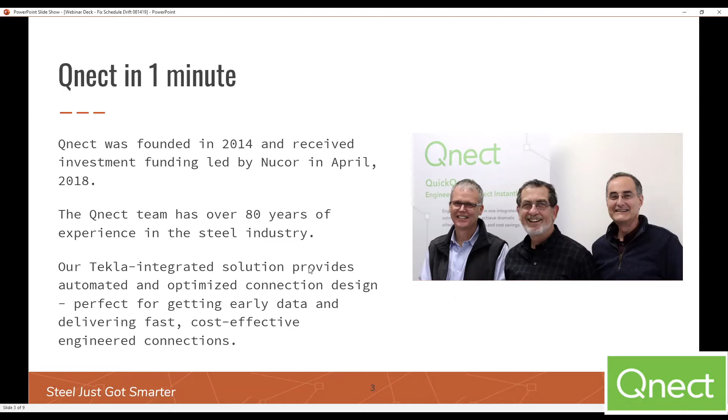So here, let's start the technical presentation, and we're going to cover two areas that are very powerful in helping minimize schedule drift. The first one has to do with the extraordinary speed of our software that will provide weeks and weeks, if not months, depending on the size of the project, of buffer time that will help facilitate changes that will happen.

The second part of our software and presentation's power is the speed in making revisions. Obviously, there will be a great deal of revisions on every job, and our software is extraordinarily fast for that purpose and includes connection engineering. As you know, conventional systems require a connection engineer and a detailer. We still need both, but Qnect will integrate those.

So why do changes happen? Well, obviously there are many changes, and I probably don't need to tell you what they are, but let's just do a synopsis of how it could happen. An owner has a building, they're trying to secure a tenant, they move the process back, they're anticipating a tenant by a certain date, therefore we move the erection date, drawings for approval date, and therefore the design drawings need to be released by a certain date.

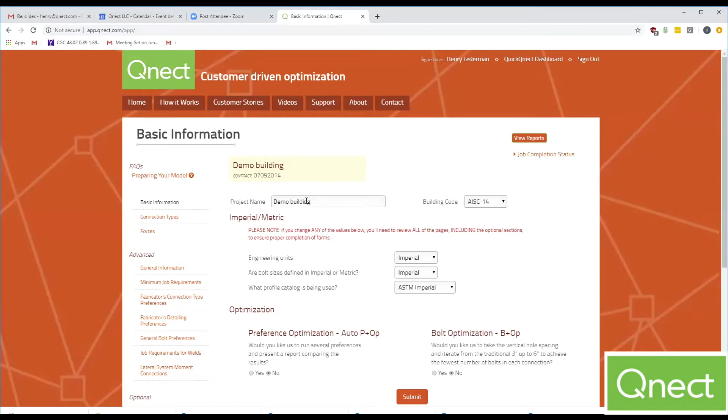Let's now move to the first part, but the first thing I want to do is a quick refresher of how Qnect works. This will be very quick. We're currently on the Qnect website. We have a job called the demo building, and on our Qnect website, we will prepare, set up, and introduce all of the parameters for both the design and the detailing of each joint. Each joint is custom designed, and a custom Tekla component is produced.

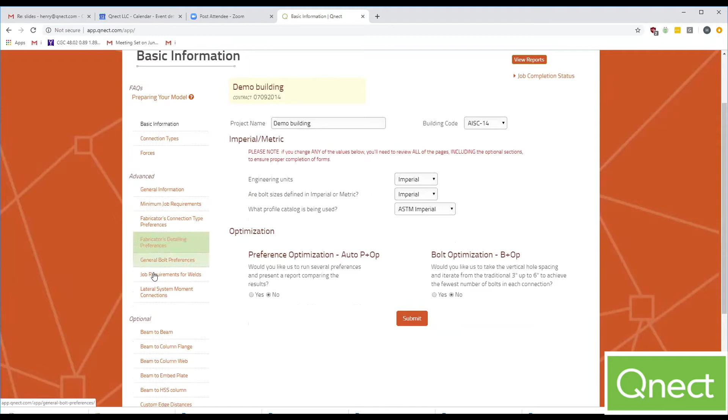Once this is all filled out with our support, then we're ready to have this information follow the connection engineering and the modeling from day one all the way through revisions. And of course, including estimating, where our software is often used in support of the bidding process.

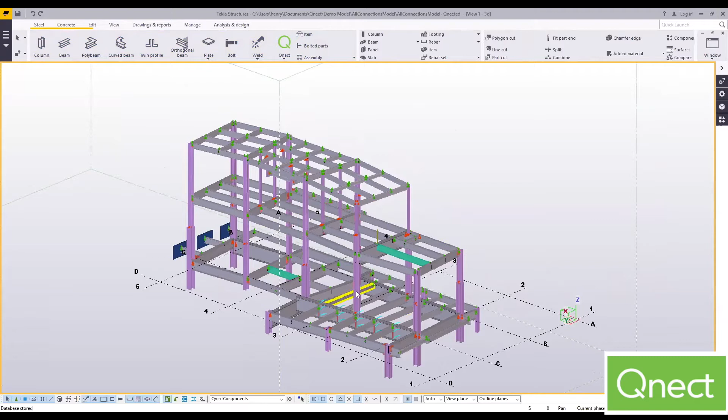Once you've signed up with Qnect and you open your Tekla model, which we're on currently, our buttons Q1, 2, 3 will show up. And the process is the same whether you're doing one joint, one floor, one phase, or the entire building. This is an already Qnected building. We connected about 201 joints, and we would have selected the whole building and hit button number 1. Then we would get an email that said it's done. We'd hit button 2, and this information would be populated back into the model.

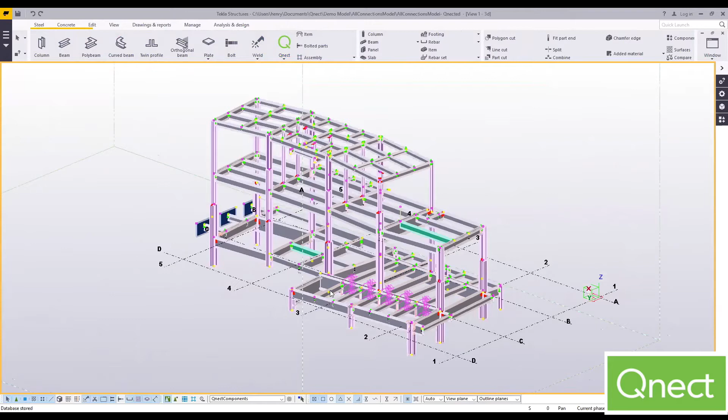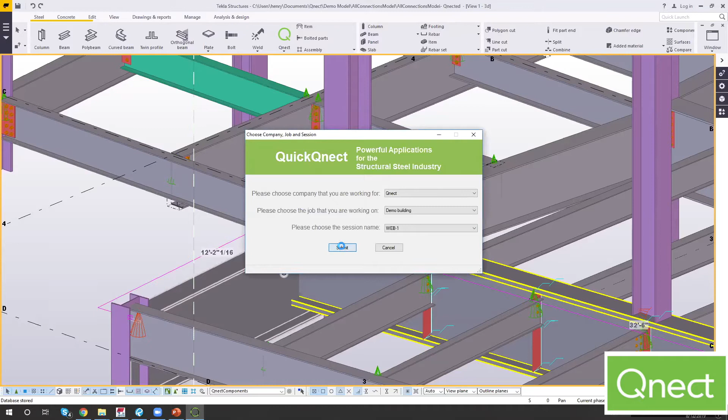So let's at least do one joint because it will take about a second. We select these members. We hit button 1. And this comes up. We sign in. We find a company. We find a job. And we will call this session Web 1. We submit. We don't have to wait for an email because with one joint, it is extraordinarily fast. And we see that it's already there. We submit, and it's complete. All right, so that's the process.

And as you can see, this uses the 3-inch standard spacing. So let's just show you very quickly what happens when we optimize a joint to give you the dual opportunity for speed and savings. So there are about 6 bolts. We'll delete this connection.

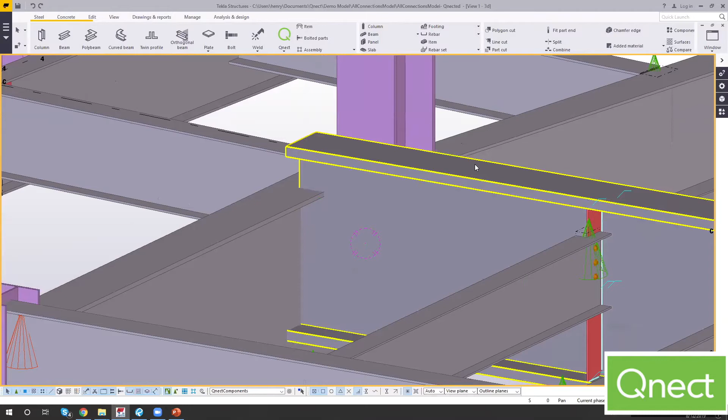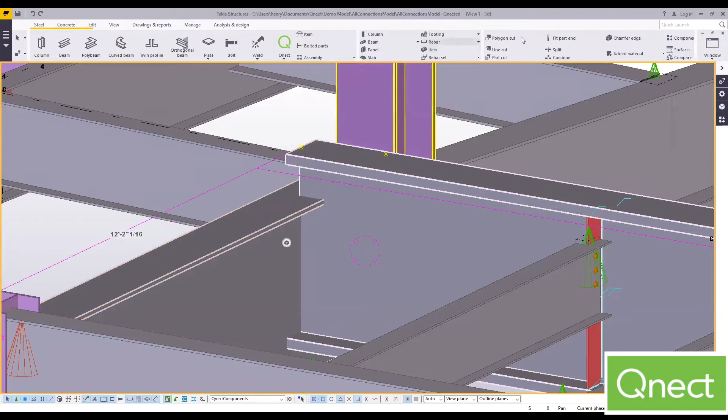We will go to the website and activate the optimization. We'll submit back to the model. Once that's activated, again, we'll select both members. We hit button 1. We'll give it a session name. We submit. We know it doesn't take very long.

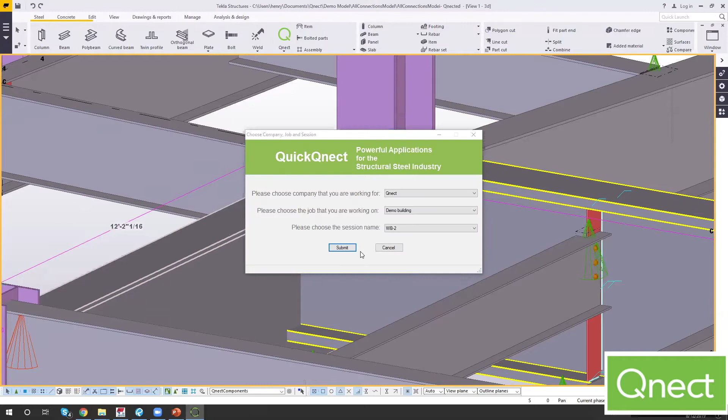We hit button 2. And it's not ready yet, so it's taking just a tiny bit longer. We'll hit button 2 again. And now it's ready, as you can see, and we submit. And we see for the very same reaction, this connection is now reduced by 2 bolts or 33 1/3%.

So this is the process. Whether you want to use optimization or not, it's button 1, button 2, and the whole model is done, or 60 to 80%, and then the connection is fully engineered.

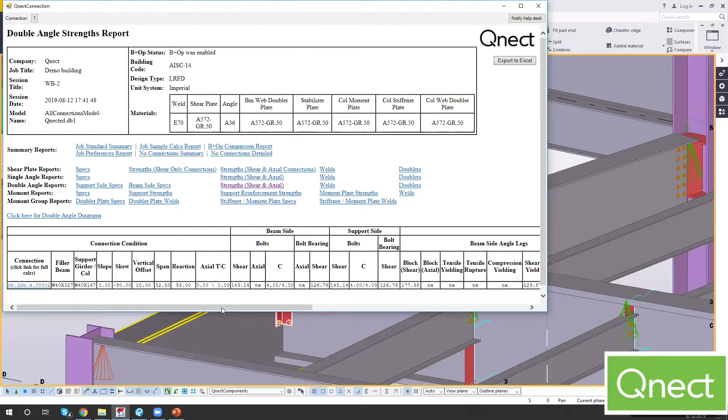Now let me show you real quick. Here's the first output, just the bolt size, angle size, general data. Then we'll show you the strength, which is the output limit states, all the limit states. And then if we click on the code, we'll see all the calculations, AISC references, etc.

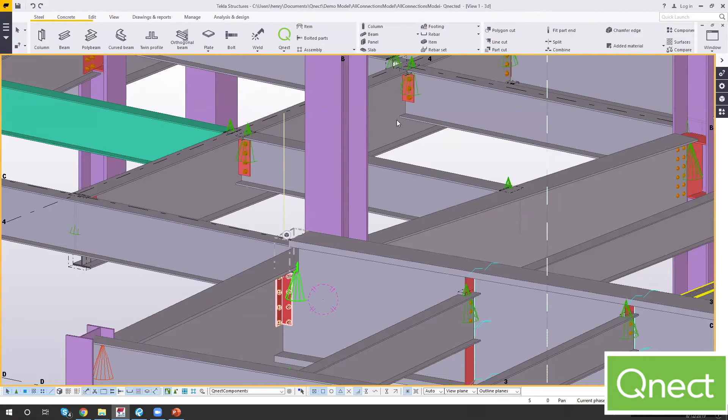So you've now seen the speed, the modeling, and the engineering. So let's just now look at how the speed creates the buffer of time. And you may want to jot down just for yourself, because you're going to be the one to determine it. How long would this model have taken you for connection engineering, and then for a detailer to model the connections in, no matter how fast they are and how well they use Tekla macros?

We all know that detailers are really pretty smart and fast with it. But the whole process between waiting for connection engineering, detailer interpreting the chart, creating the macros, putting it in, and then the detailer checker checking to see that that was done completely. Just write down for yourself how long that would have taken.

And now that you've done that, let's just note that this is about a 50-ton project. We connected 87%, and this 87% of connections, these 201 connections, took 1 minute and 20 seconds. So if you reduce 1 minute and 20 seconds from whatever you wrote down, whether it's 2 days, 1 week, 1 day, that's the buffer we created on this model.

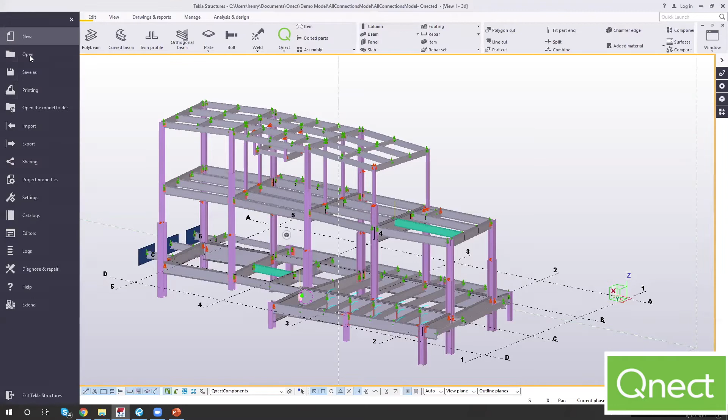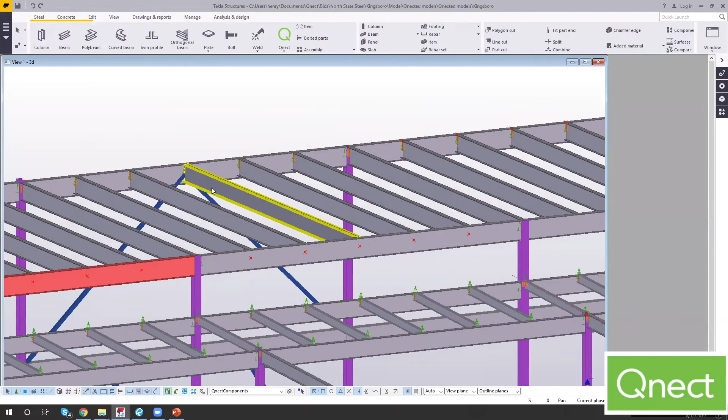Let's go take a look at a couple others. And just bear with us as these models get populated into the Tekla software so that you can do your analysis again. So here is another model where we Qnected it. We Qnected about 66% of the joints. Another, it's a nice job.

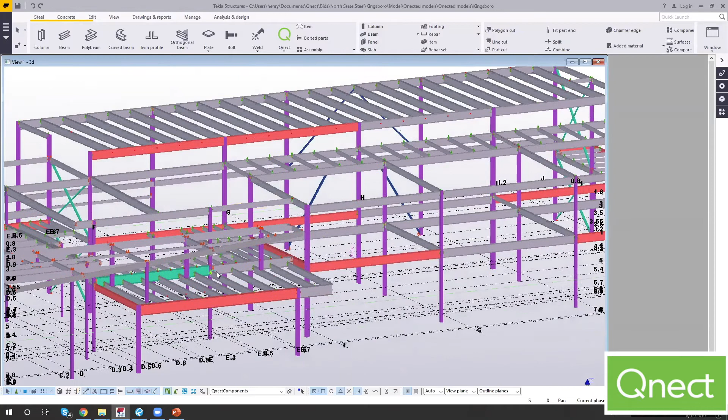It's about 200 tons. And I'd like you now to write down how long it would have taken, not just to model it, but the process between the connection engineer and the detailer that ultimately results in all of these connections being placed in the model. All right. And now that you have completed your math on that, I can report to you that we Qnected around 66% of this particular building, over 400 joints, and we did it in less than 10 minutes.

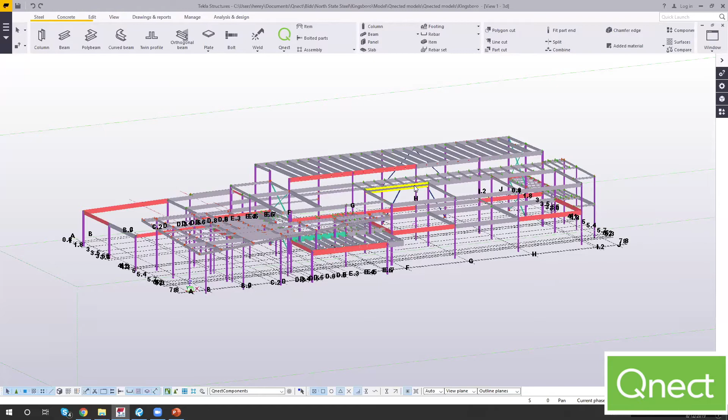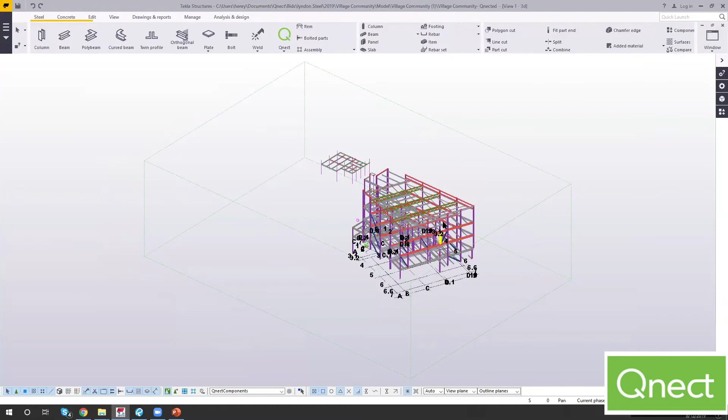And now I'm going to show you two more. Let's see, a village. Okay, that's fine. Let's do that one. And again, just bear with us as the model gets populated. We felt it was important that you see actual models of different sizes, so you can really start to appreciate for yourself how the buffer could get created.

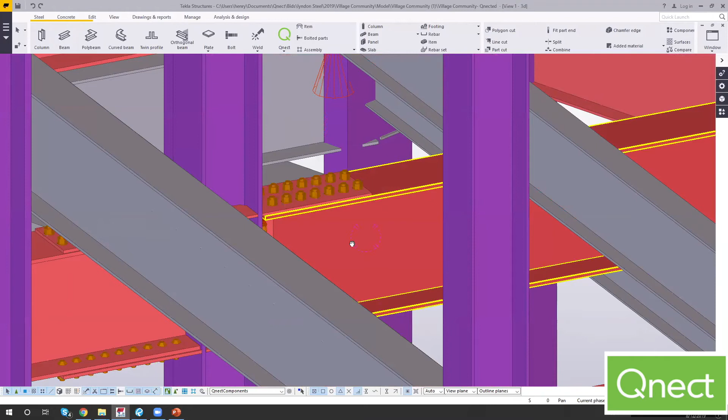So we see connections. Actually, this one, it's a very clunky building, very odd shape. I think we've got some moments in here. Here we go. You can see a Qnected moment connection there. There you go. So we've got quite a few connections on this one as well. Some more moment connections. We also do full pen weld.

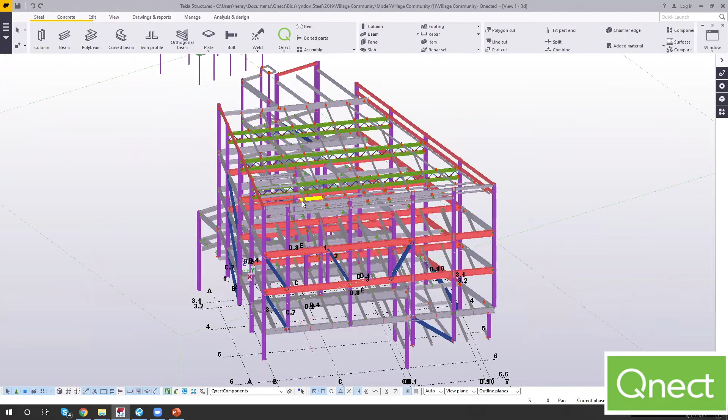So this model is 430 tons. We connected 53%, for different reasons that we could investigate. And often our first run is not where we stop, because then we go back in and we can increase the count, sometimes 5 to 10%, once we understand why it didn't connect.

So please write down again how long you think this would have taken you. Again, connection engineering, waiting for that, and so forth. So we connected about 53% of these connections, and this one also took us less than 10 minutes.

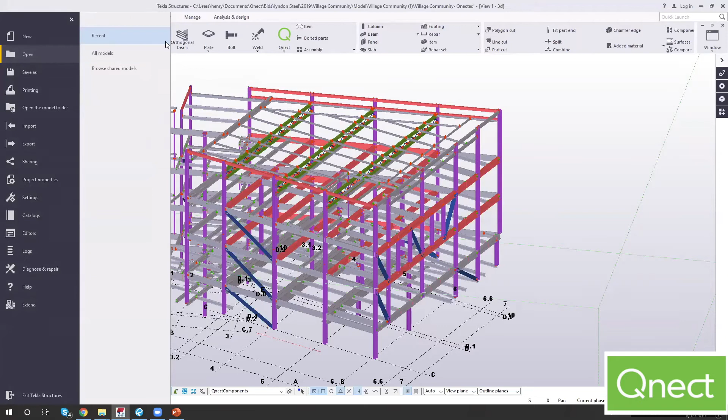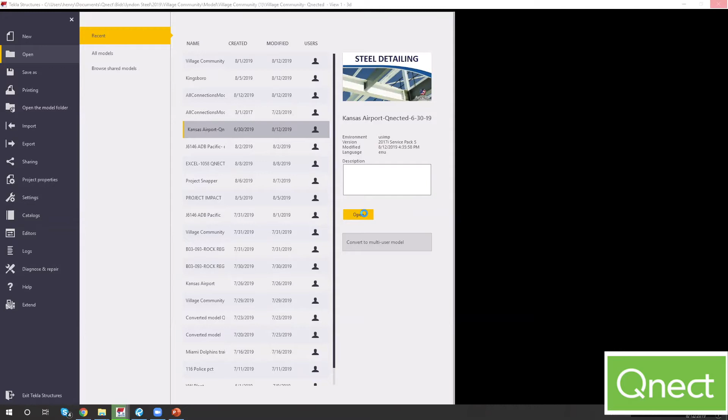And the last one I want to show you is a little bit of a larger project. This one is a project that is currently being negotiated. It's still in bid. So it's a pretty fresh project that people are competing for, and just bear with us, if you will, as this one gets brought in. It's, let's see, I think it's a little over, close to 9,000 tons.

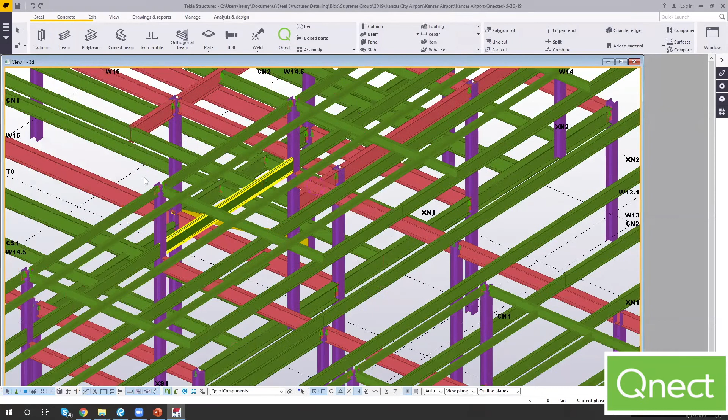And so we start to zero in on the connections. This one is not super complicated, but lots and lots of connections. There are many things complicated about it for sure, but Qnect is able to run through this pretty quickly. So make note and write down for yourself what you think this will take for connection engineering and detailing back into the model.

Now that you've done that, I can tell you that we've connected close to 6,000 joints, a little over 60%. And this entire process, once we had filled out the parameters on the website, took 2 hours. So if you remove 2 hours from your amount that you have stated it will take, there is your buffer. We did a 30,000 ton, 60-story building, 15,000 connections in about 3 hours.

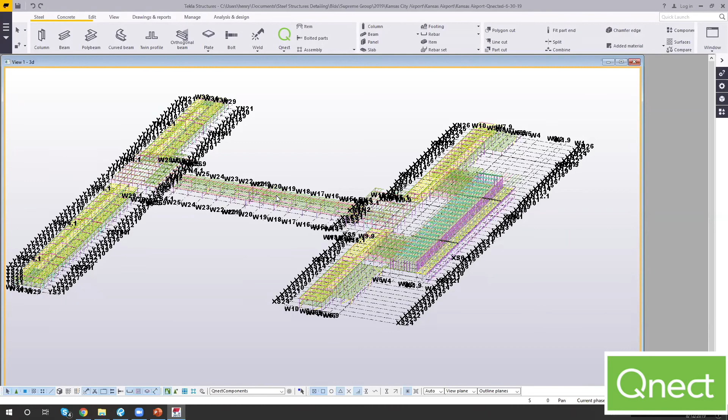So there is no question, not because we said so, but because our users have reported back, we will save weeks. And on one job, we are saving 19.2 weeks. Let's see, what's that job? I'm trying to remember now what it was, but it's a pretty big job. I can't say what it is, but we generally see time savings of 20 to 30% of the detailing time.

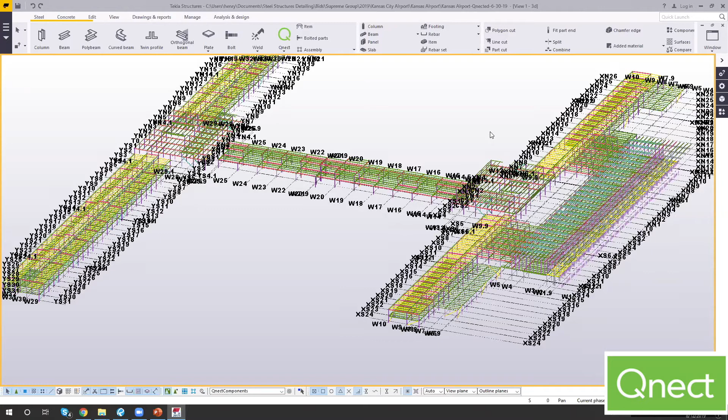And so if you think about whatever the detailing time is that you're expecting on a job, if on the low end you took 20%, so if it's 15 weeks, you're going to save 3 weeks, and there we start to create the buffer. So that really is the extent of what we wanted to present in terms of the first part.

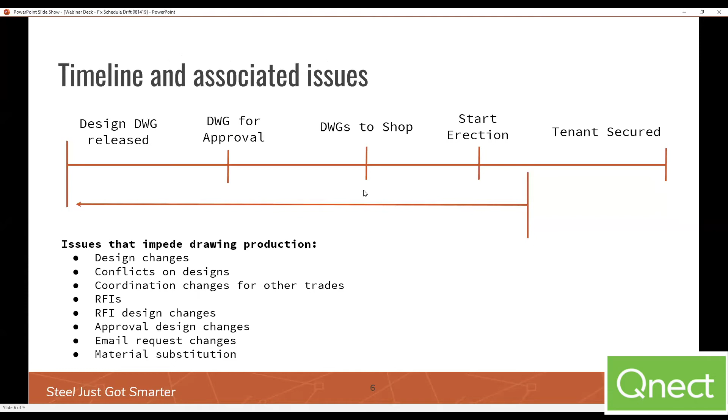And now we'd like to turn this over to Islam Radwan, another one of our technical members. He's going to actually make a revision with the combination that you just saw of connection engineering and detailing, because the speed of the software is extraordinarily important on the second major area that derails and causes schedule drift, revisions. We talked about that earlier, revisions from numerous sources, coordination, late mechanical. You can't get away from that, but you can mitigate it. So with that, Islam, please take over.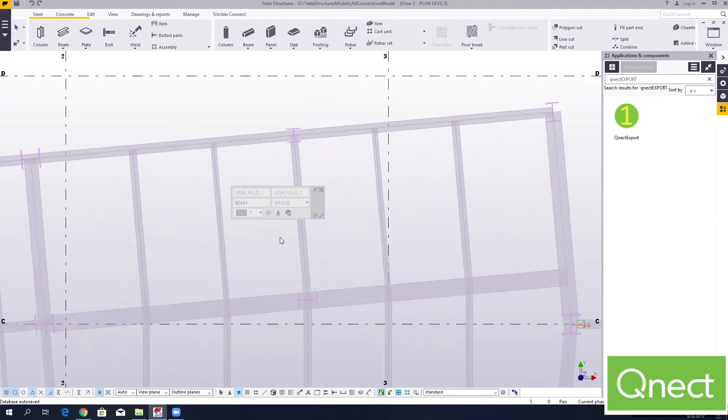Hello, thank you, Henry. Now I'm going to do a revision in the model and show you how Qnect can handle revisions quickly. So I'll switch to the floor plan here. In this area, we're going to do a change. So first we'll delete the connections. And then I'm going to move this beam. And this beam also will make it skewed. I'll add another beam here and then change some of the loads for another one.

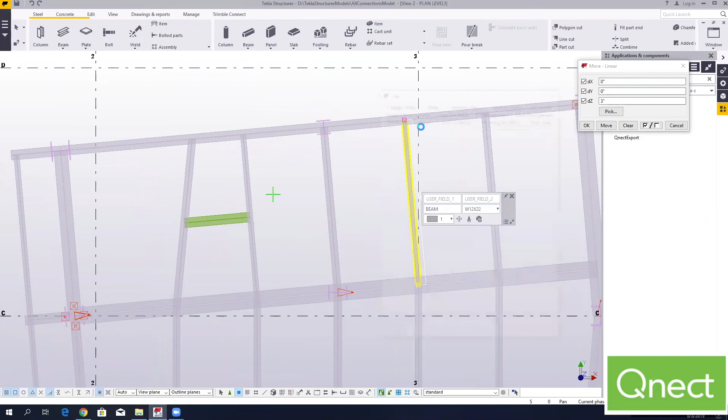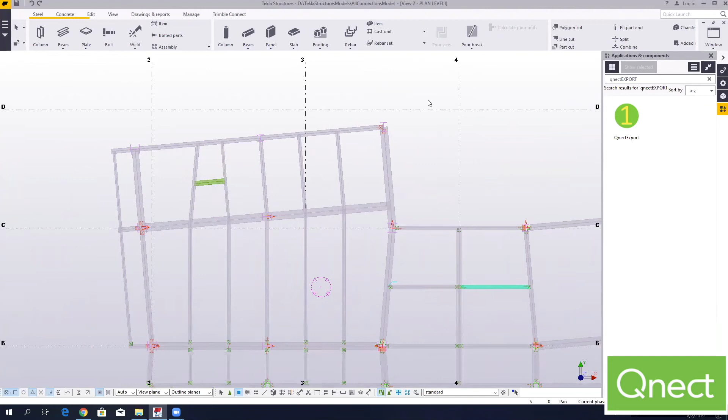Let's make this 20. And let's also change the beam size, Islam, would be good for the users to see. Okay. And this beam size as well. Okay. Then we'll select this whole area and then we'll do Qnect button 1 and export. Button 1 and export. I'll just put 0.1. Yeah, we can also use an RFI number or the bulletin number, and that's fine how you have it, because that is also tracked on a report.

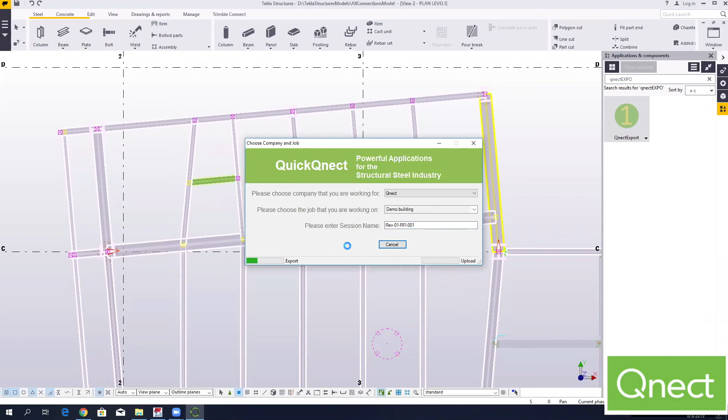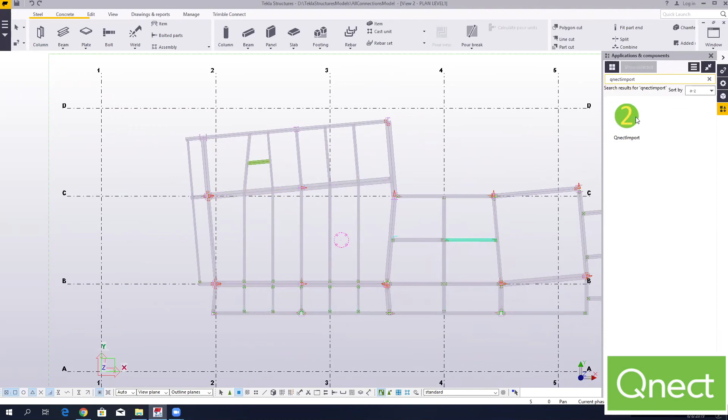Okay, and then we'll now upload the changes. Doing this revision manually is time consuming, and also you may need to check with the connection design engineer for each one, but with Qnect you can get all the connections fully designed and engineered in a matter of a minute. So we'll try now and see. So those are done. We're going to import. And the connections now are added and the revision is made. Switch to 3D as well to see.

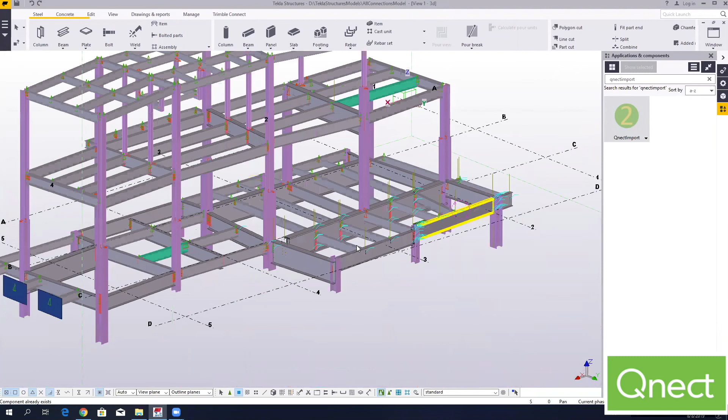All right, thank you, Islam. So that's how Qnect handles revisions very quickly, by just changing the model and re-uploading the connections to the Qnect website, and then the connections get engineered in a matter of a minute. And just to repeat, there are two ways that you can mitigate schedule drift. The first one is thanks to the extraordinary speed. We combine the connection engineering with the modeling back into the model. And the time that it takes to do it in the conventional manner creates the buffer, because no matter the size of the job, we can have it done within hours.

And second is the speed at which revisions are produced, and certainly aided by the fact that we're also engineering it at the same time, so there is little to no coordination with the connection engineer.

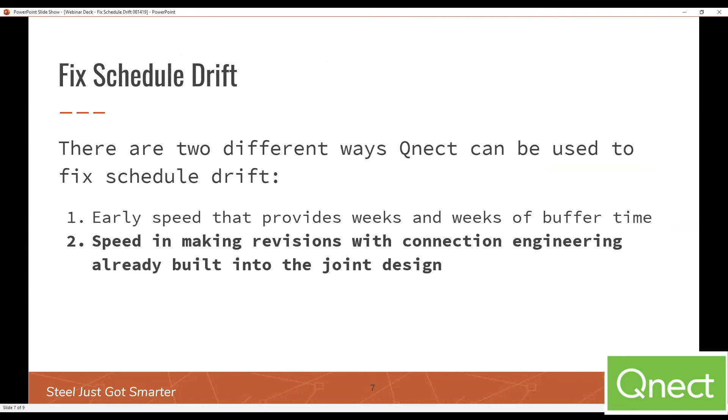Yes, so the first question that came through is, can Qnect help get shop drawings back faster?